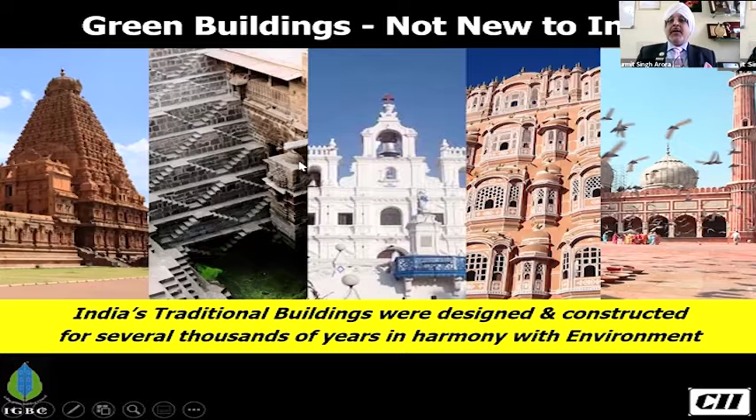If you look at the earlier structures constructed in India, you will see that they were having passive and active design, and they were absolutely green as far as ventilation and daylighting is concerned. You go to the Taj Mahal in Agra, you go to the Bahai Temple in Delhi, you don't need a fan. You can stand anywhere, even in the summer, and you feel cooler. A green building basically is 3 to 4% less in temperature than ambient temperature, even without active cooling, an air conditioner or a fan. Next slide. We have lost this tradition somehow in urbanizing India.

Now I want you to look at this slide very carefully, because this building, you see the roof now, and I'm going to show you the same building with a changed roof. Mala Singh is going to be speaking about net zero energy, and this building is a net zero positive building now. It produces more energy than it consumes, and we are also certifying it for net zero water very soon. Now, the roof, you see, it has a green roof on top. There's the plantation, landscaping, and you see very little solar panels on the right side.

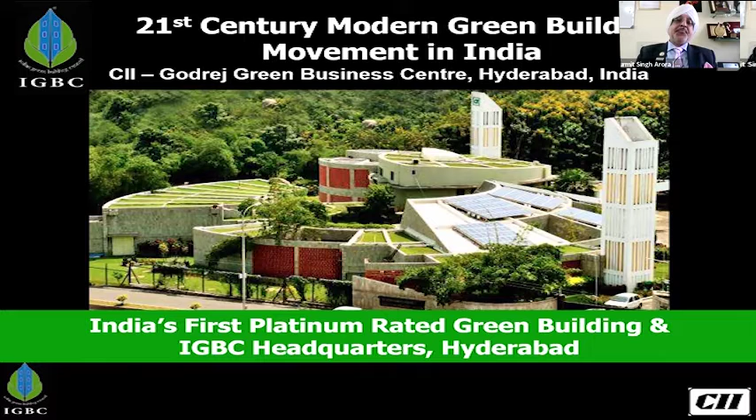In the beginning of India's green building movement, IGBC was formed in 2001 to enable sustainable built environment for all, and for India to be a global leader in sustainable built environment by 2025. We are one of the founding members of the World Green Building Council. There are 70 all over the world, and we are number 2 as far as green footprint is concerned worldwide.

A green building optimizes the use of water, energy, conserves natural resources, uses materials in abundance rather than in depletion, generates less waste, and provides health and well-being to the occupants. Most of our software centers have a higher productivity rate of 20-25%. Our healthcare rating ensures that the patient recovery rate is 15-20% faster.

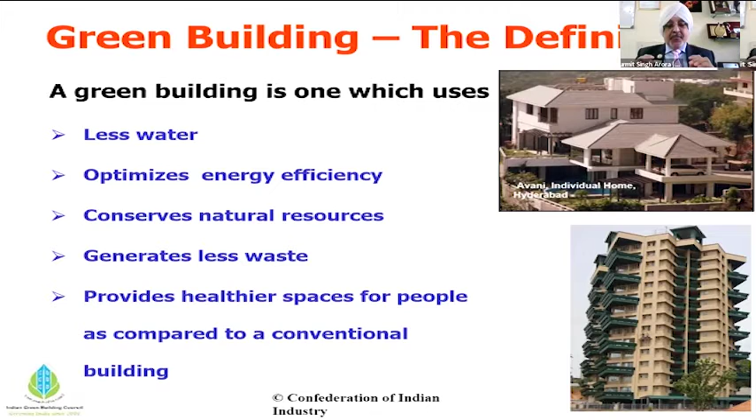So there are advantages in going green, and today green buildings do not cost more than a conventional building. We have enough case studies showing you that it doesn't cost more than 1%, and therefore it makes good business sense to go green. Next. Now, we have 30 ratings.

We have a green village rating, we have a green metro rating. There is no metro rail station in India which is not certified by IGBC. We have healthcare rating, we have hospitality rating. A metro rail station requires air conditioning, does not have public toilets. A railway station has public toilets, the need of water and sanitation. So the needs are completely different.

All our 30 ratings are aligned to Jal, Vayu, Agni, Akash and Prithvi, based on this ethos of the 5 Panchbhutas. For Prithvi, we look at sustainable sites. On water, we look at efficiency of water, and we are now moving towards net zero. We have a lot of projects which are net zero on water and waste.

Now, Shabnam ji spoke about waste, but what are we going to do about electronic e-waste? The amount of cell phones that these youngsters change, laptops, work from home, now everybody has a laptop.

Where is this e-waste going to go? So the real issue to address waste is not toilet waste or plastic waste or paper waste. We have to address where we are going to use this e-waste. Energy efficiency, indoor environment quality as far as Vayu is concerned, and daylighting, night sky pollution as far as Akash is concerned. Next.

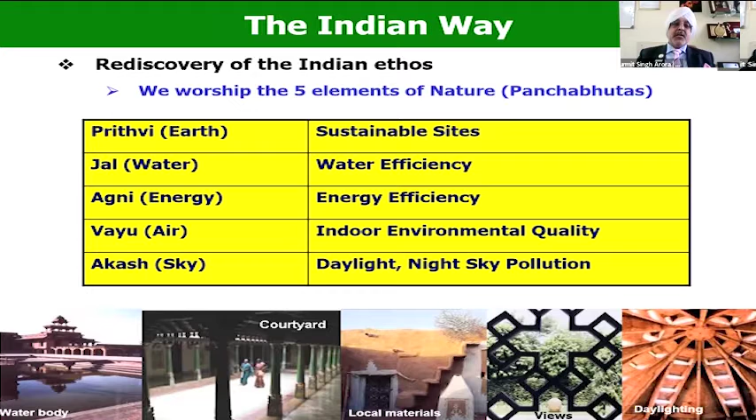So we look at what our challenges were from 2001 to 2010: availability, affordability. We did not have green materials here. Today, IGBC has 2,000 products certified for their greenness. Now, when I talk of greenness, we talk of embodied energy, energy required to make the product, embodied water, embedded water, what we call virtual water.

A cell phone takes 2,500 liters to make. A t-shirt takes 1,500 liters to make. A kg of rice takes 1,300 liters to make. So what I am trying to say, every product has an embodied energy, embodied water. Does it have recycled content? Does it have recyclability potential? Is it low on VOC?

So we look at different products. We did not have these products earlier. We did not have access to them. Now our green product rating has, for example, fly ash cement. We are using fly ash. Now we are using all the fly ash from the thermal plants, and therefore 2,000 products are now certified by a GreenPro rating system, and these are all available in India, bringing down the cost of green. Next. Sandeep, next slide.

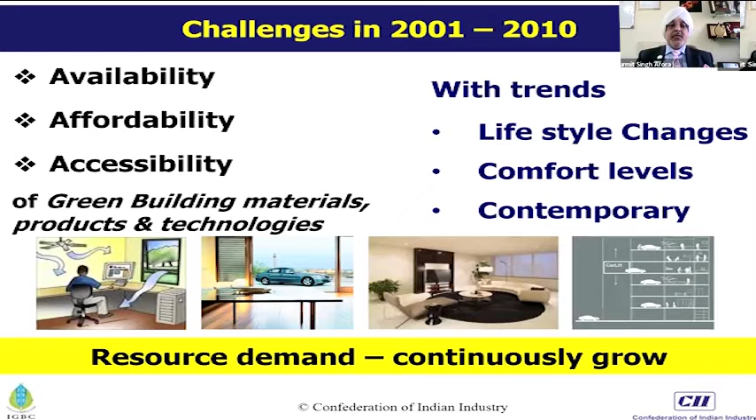So we look at passive design, we look at orientation, sun path, simulation of the building, daylighting, skylighting, light pipes, we look at AAC blocks, materials, fly ash based cement, insulation, bringing down the temperature of the building compared to the ambient temperature. We look at self shading, we look at building envelope, we look at performance, high performance glass.

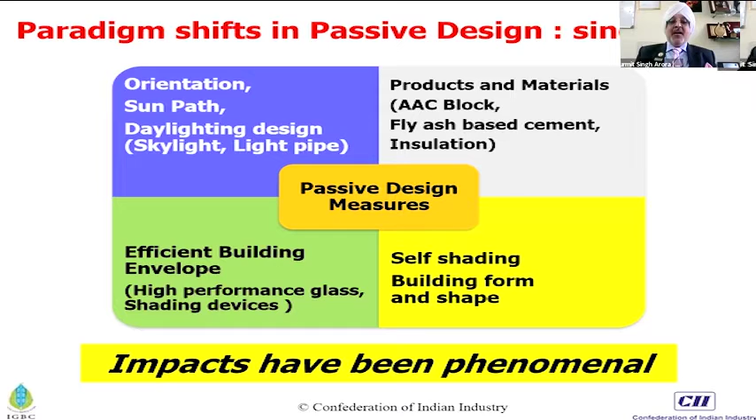Now there is a myth that green buildings only use glass. We have some buildings where you only have glass on one side and the other three sides there is no glass. So it's a big myth that green buildings use glass, and earlier somebody had put a newspaper article also. It's not all about glass. Next slide. We have active design measures.

We look at equipment with alternative forms of cooling, geothermal, tunnel cooling. We look at air conditioning through tunnel cooling. We look at wind towers, high efficiency pumps, motors, fans, variable refrigerant flow, variable frequency drives, LED, CFLs, lighting controls, vertical transportation, building automation systems, and high coefficient of performance chillers, absorption chillers. Today, due to the 5-star rating, air conditioner consumption has come down by 35-40%.

I would like to tell you something. I am the chairman of CII IGBC. We have more than 3,000 members. I have a drawing room which is 800 square feet, and I have 6 tons of air conditioning in the 800 square feet. I am a culprit. I am admitting I have 6 tons of air conditioning in 800 square feet.

We did the Reliance Corporate Park, 640 acres, 700 square feet, 1 ton of air conditioning. So the chairman of IGBC is using 6 tons to air condition 800 square feet. And Reliance Corporate Park, we used 1 ton of air conditioning for 700 square feet. Reliance Jamnagar, 850 square feet, 1 ton of air conditioning. And these are all facts and figures I'm telling you.

So you can imagine there's been a visible change, where we always thought that a 200 square feet bedroom means 1.5 tons of air conditioning. And now we are able to bring down the building envelope, the building temperature, and therefore reduce the cost of air conditioning. Next.

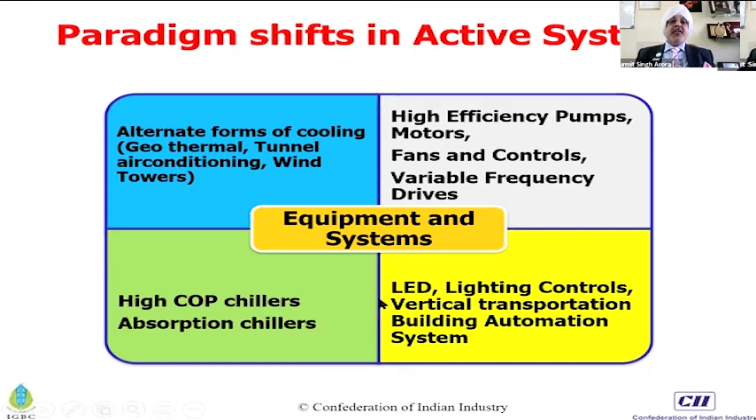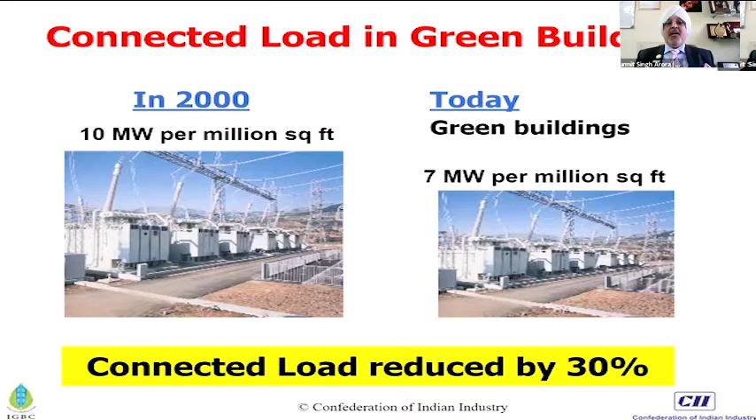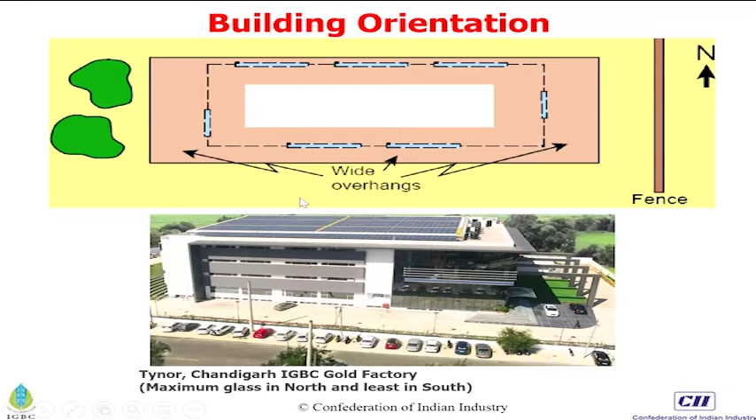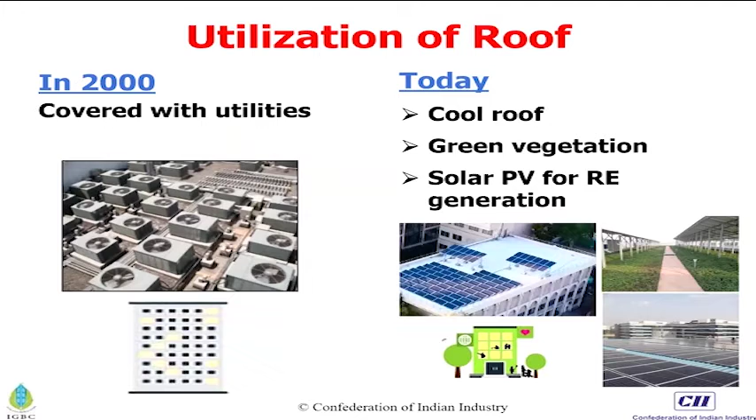Next. In 2000, the roof was covered with utilities. Now it's covered with a cool roof, reflective paints, vegetation, solar PVs. And now in the Green Building Center, we have installed a solar PV panel which produces energy on both the sides. So even when I'm in the sun shadow region, the reflective paint reflects the sun's rays onto the bottom of the PV panel, and we produce energy, and now we are net positive.

We are producing more energy than we can consume. And we have 200 employees in that building. It's not that those employees are sitting in the heat. They're all sitting in comfort zone.

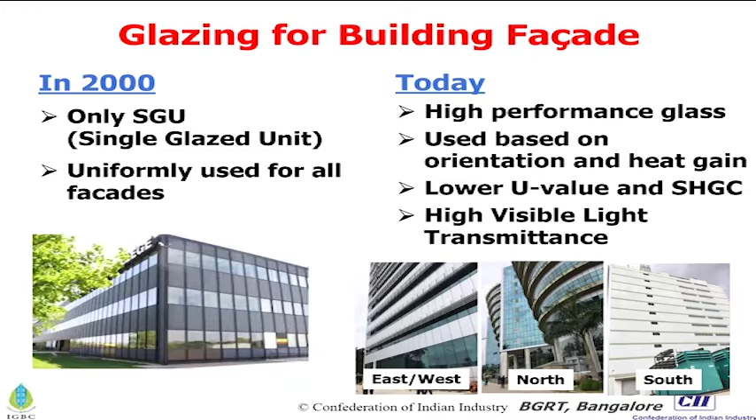So we look at glazing. In 2000, we had only single glaze units, uniformly used all over facades, as I said. Now we have very high performance glass used based on orientation and heat gain, low U value and visible transmission of light. Next. So we bring in light, not the heat.

In 2000, you looked at cooling; efficiency has improved 75% in green buildings, as I told you. And I am on the left side, I am the culprit. I am one of the culprits where I'm repeating 6 tons in 800 square feet. Next.

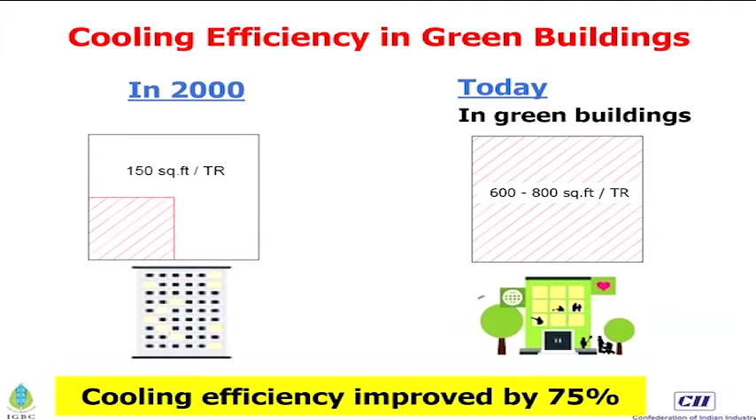You look at lighting density, we have reduced it from 1.5 watt per square feet to 0.6 watt per square feet. And we are now looking at lighting only where it is required. You don't light up everything. You light up the portion where you require the light. So lighting load is reduced by 60%. Next.

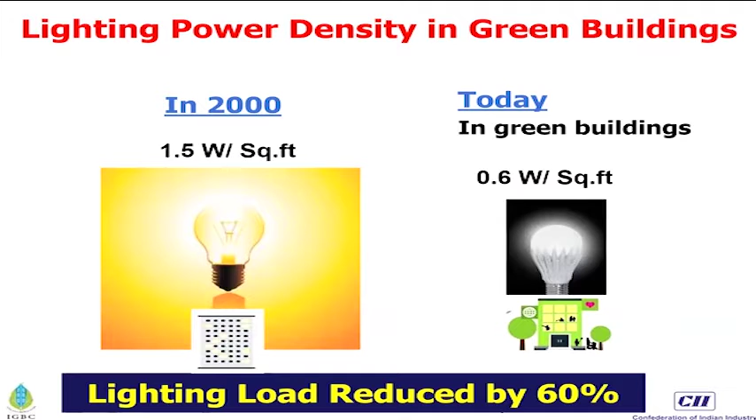Now, I'm giving you some examples. Wipro, reduction in energy, 40%. ITC reduction, 45%. CII reduction, 63%. And these buildings do not cost more than 1% more than a conventional building. Next.

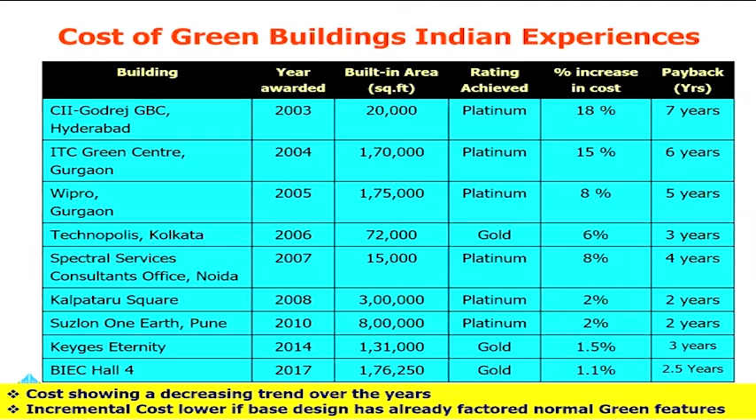We brought down the price of materials in India. Waterless urinals cost 15,000. They are 3,000 a unit now because of the volume. We are right now at 800 crore square feet of green footprint in India. We have 90% market share in India. 8 billion square feet of green footprint under IGBC. CO2 sensors, 50,000 became 12,000. Certified wood, high performance glass.

Solar PV panels, as you know now, all the government contracts go at 2 rupees 80 paisa, less than 3 rupees per kilowatt hour, whereas government is charging us 10 rupees for industrial power and much more for residential power. Next.

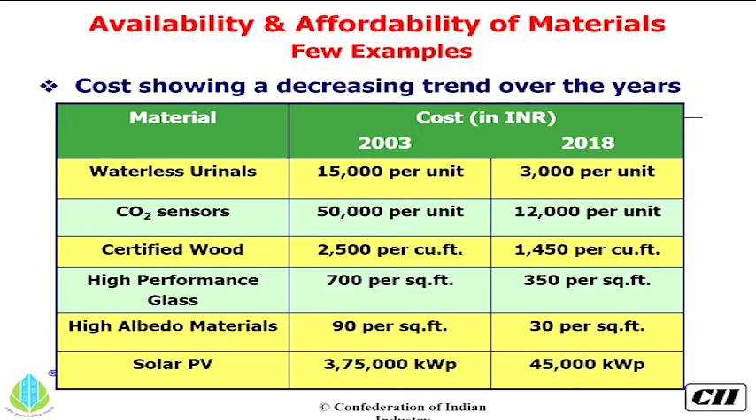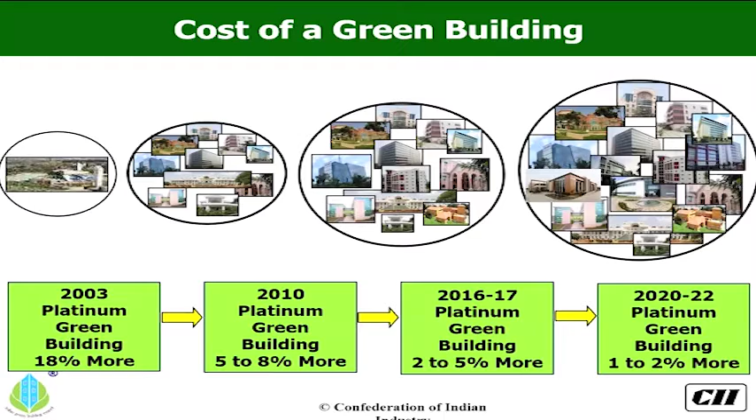So cost of green building has gone down to 1 to 2%, as I told you. And I'm talking of platinum rated building. I'm not even talking of gold, silver or just rated. Next. And there are hundreds of examples.

Now, what are the benefits of green building? Tangible benefits: reduction in power, health and well-being, improved health and productivity. Intangible benefits are there. Energy saving, water saving, reduction in initial investment.

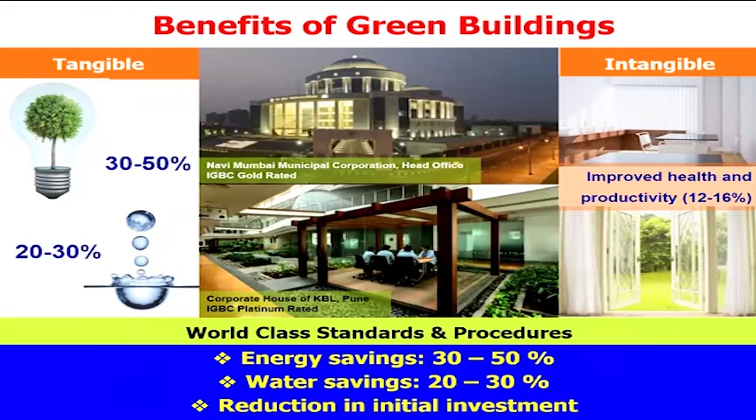Next. We only have 10 minutes. We are running out of time. Next.

So we have 2,200 projects. Can you go back, Sandeep? In 2,200 projects, we have reduced carbon dioxide by 12,000 tons, energy by 15,000 megawatt hour, water by 45,000 kiloliters. That is equivalent to 1 month's water of Hyderabad city.

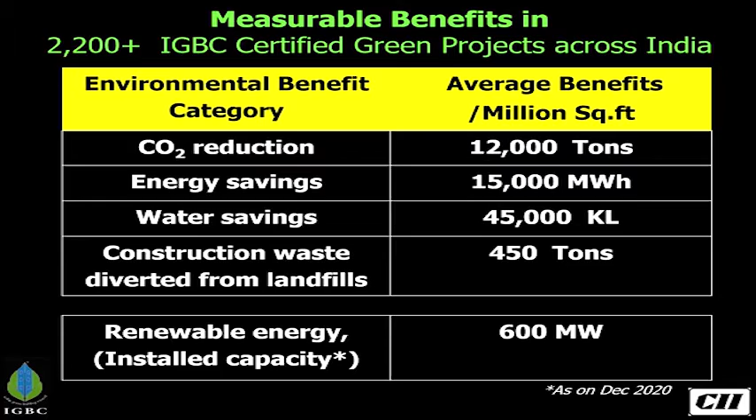Construction waste 450 tons diverted from landfills. This is per million square feet I'm talking about, per 10 lakh square feet. And we are at 800 crore square feet. Renewable energy 600 megawatt. Next. So, the journey towards the green built environment. Next.

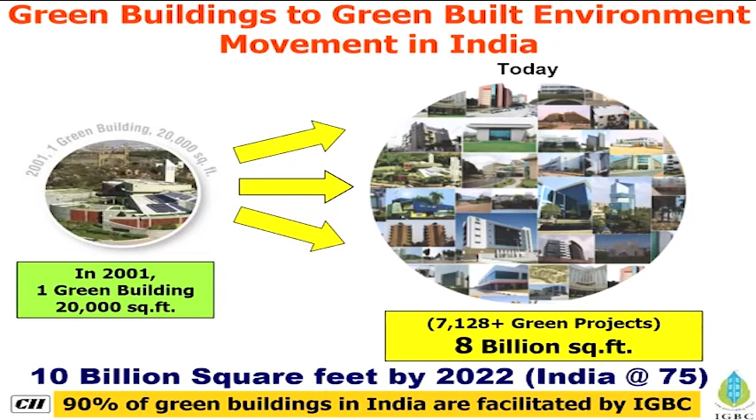We are right now at 7,200 projects. From one project, we planted a seed in 2001, nurtured it into a forest, and this forest is really growing because we aspire to become the biggest green building council in the world by 2025. We are now looking at net zero energy and waste for all existing buildings by 2050, and we will bring in legislation. We are working with government so that all buildings that are built in India must be certified.

Next slide. I went to a very big builder site. They take me through the flat. It's all air conditioned. Only one window opens 45 degrees in the drawing room. And I said, my children can't live here day and night in a controlled atmosphere of air conditioning. And he says, sir, we have 21 lakh square feet garden downstairs. We are absolutely green. I said, bullshit, you're not green.

It has taken me 10 years to convert that group. And now they have signed up with IGBC that all the buildings will be certified green. Just by putting gardens and landscaping, you're not green. You look at renewables, you look at alignment to all these sustainable development goals. Next.

Ladies and gentlemen, a French physicist says man is the most insane species. Man means there are ladies here also, women also. Is the most insane species. They pray to an invisible God and destroy a visible nature, not knowing fully well that the nature they are destroying is the God they are praying to. Jal, Vayu, Agni, Akash and Dharti. They are destroying it, and there is no tomorrow.